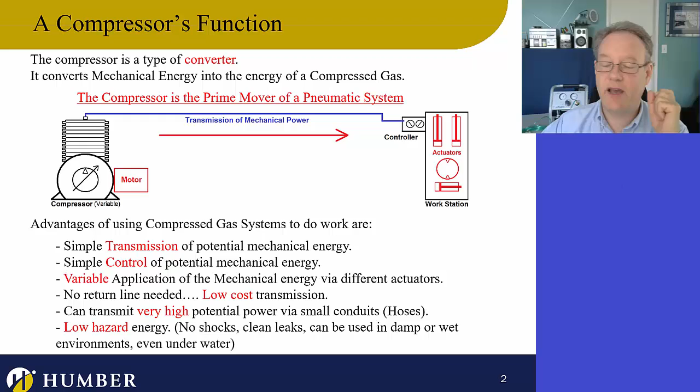Nice and safe - so pneumatics, it's pretty special, pretty cool stuff. So what goes on with compressors is that it takes air in and then it blows air out. The nature of the air coming in is just the atmospheric air.

It's not under pressure - it's not under anything more than 14.7 psi, just standard atmospheric air that's here. Then what it does is it compresses it, lowers the volume, and shoots it out of the compressor. So think a little bit about the flow rates going on here.

The gas that comes in is the inhaled gas, and the exhaled gas is a smaller volume. But the amount of air going out is kind of the same as the amount of air coming in - if I had this much air coming in, it would be compressed to this, but the same amount of molecules would be going out.

But the flow rate of air going in is actually different from the flow rate of air going out. That's because we study flow rate not by how many molecules are going in and out, but by what the volume of that air is. So essentially it comes in at low atmospheric pressure and leaves at a high pressure, and it comes in at a larger volume and leaves at a smaller volume.

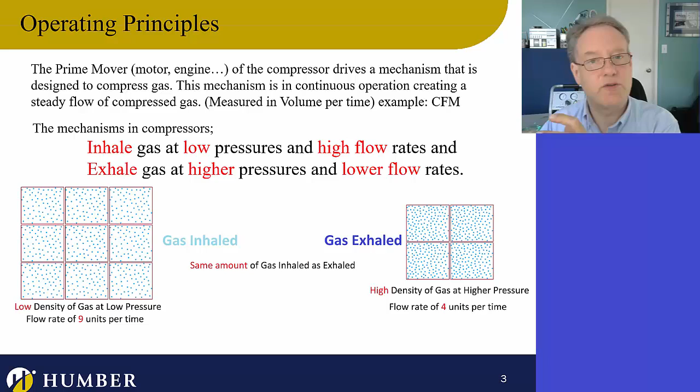There are two kinds of compressors: one is dynamic, and the other is displacement. Dynamic compressors generally have a higher flow and a lower pressure. Displacement compressors don't have really high flows, but they can have really high pressures. So they work under different principles, let's take a look at what's going on here.

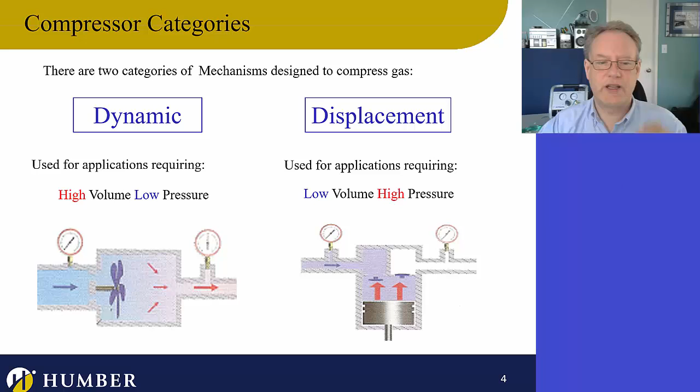The dynamic type adds kinetic energy to the air - it just speeds the air up. As we know, we talked a little bit about that last week, about the dynamics of the gases inside a chamber.

The faster the molecules are going, the more pressure they create, and you feel that on the outside of the wall. We talked about how Blaise Pascal understood that the pressure felt has to do with the kinetic molecular energy banging up against the walls. So if we increase the kinetic molecular energy, we're increasing the pressure.

And we can actually have really high flow rates with these things. You'll see, I've got some pictures here and some examples, and you'll see that going on.

So what's going on here is the displacement type actually grabs onto Boyle's law. It just says, okay Boyle, let's make your law work. What it does is it takes a certain amount of gas and doesn't add kinetic energy to it. It just crushes it. So it increases the displacement, increases the density of the kinetic energy, which is increasing the pressure. So it lowers the volume, and in that way it actually increases the pressure.

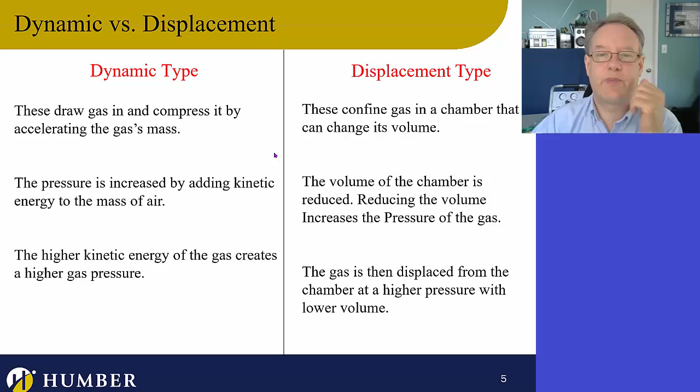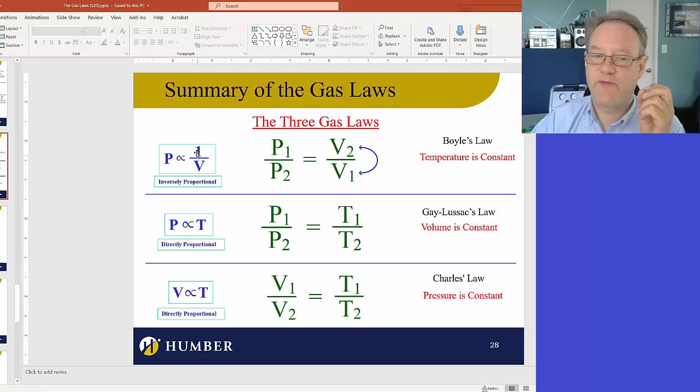And we know Boyle said that. Let's actually take a look at what Boyle did here. As you can see, the pressure and the volume are inversely proportional. So when the volume goes down, the pressure goes up, and vice versa. That's how compressors work. The displacement type of compressor, that's how that works.

So essentially, when we look at these two types, dynamic and displacement, we can see there are a whole bunch of different kinds. We're going to kind of only look at displacement. We'll take a quick look at dynamic, but in the pneumatics industry, if you go into any kind of manufacturing industry, which is pretty much every kind, you'll have to understand the different compressors. Mostly they're going to be using displacement. There are some special things that use dynamic, and we'll take a look at those in a minute.

But essentially, for displacement, there are two kinds: one is rotary and the other is reciprocating. Rotary is this thing that turns, and the nature of how it's turning compresses the gas. It's pretty cool. The reciprocating is just a piston going up and down, or a diaphragm going up and down as well.

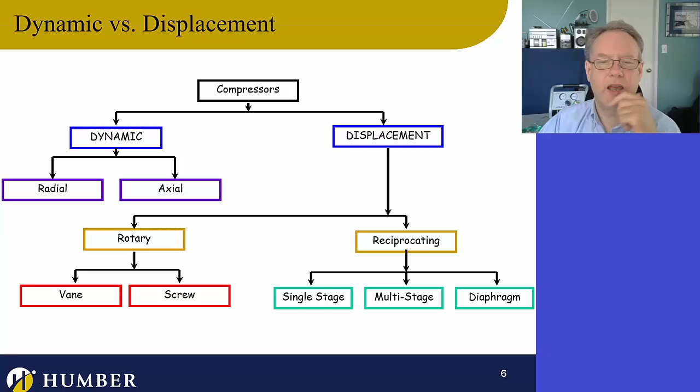And this is a good example: air mattresses and HVAC blowers. Those vents in your home, the air coming out of there is actually under pressure. The pump that's the prime mover in that system, the actual pump moving the air, is a radial type, and it's sucking air in and then pushing it out.

I don't know if you've ever seen one of those fans, but they look pretty cool. They're actually just a huge one of these things, much bigger than this. And you've probably blown an air mattress up. If you haven't, air mattress pumps are pretty cool, and they make a lot of noise. You can hear them going really quickly. They're a little annoying, but those are the kind you plug into your cigarette lighter or power plug in your car, and then they go.

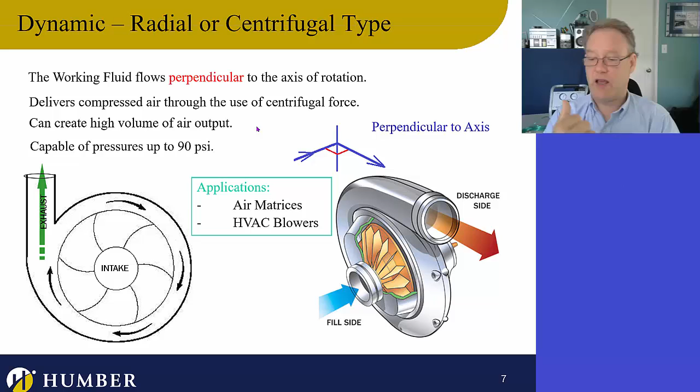So all the piston types, we use for manufacturing, automotive, automation, construction, painting, home use, recreational. If you have a little compressor that you want to fill up your tire for your bicycle or your car, you've heard those things.

You plug those, they're 12-volt things. You plug them in your power port in your car, and you can hear them vibrating, and you can kind of hear the speed at which they're going. You can hear their frequency. If you plug in one of those pumps for an air mattress, you can hear they're a lot faster. They really work on speeding up the air.

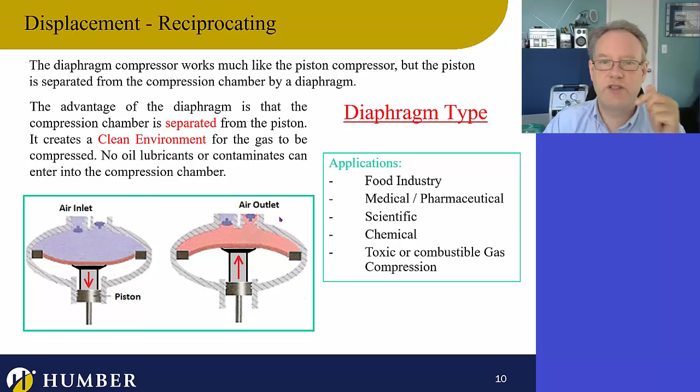Scientific, chemical, and toxic and combustible gases have to be handled so they don't blow up. We're going to use these compressors. They're pretty cool. In the medical industry, most of the pumps and equipment they use are like that. In surgical procedures, or compressing oxygen especially, they have to use these because oxygen can blow up real good.

As far as the two kinds of types go, what I want to do now is jump into a bit of the gas law theory. We have to understand the gas laws to move forward here. If you didn't get that, go back to last week and watch the video about the gas laws, because you have to understand that to move forward at this point.

Charles and Gay-Lussac actually looked at temperature. They asked what's going to happen to the pressure and the volume if we change the temperature. Boyle was just stuck on pressure and volume. These other guys looked at how temperature plays into it, and that's what we're going to discuss right now: temperature.

There are two ways to compress a gas. When we compress the gas, as you learned last week, the temperature increases. The amount of energy in the system stays the same, but because we're compressing it, the density of the energy is greater, so the temperature goes up. So the temperature goes up, and there are two ways to compress gas.

As we make that volume decrease, we know the temperature goes up, and also the pressure goes up. So when I decrease the volume, the temperature and the pressure both increase. It actually takes more energy to compress gas if we leave the heat in it—if we don't allow the heat to leave, it's extra work to compress it. If we don't let the heat leave, the pressure actually goes up higher, because the higher the temperature, the greater the pressure.

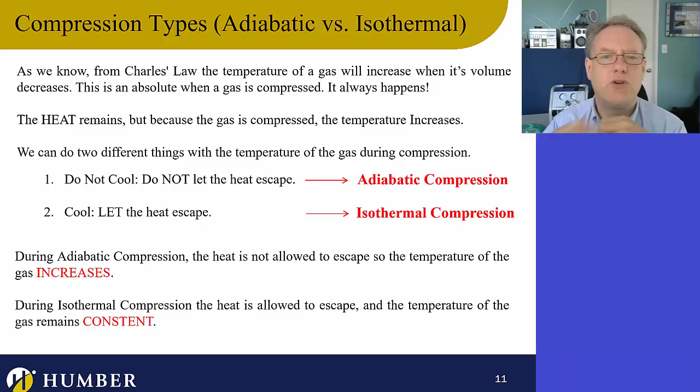That's really what we want for most compression. Adiabatic is pretty cool though—what happens with adiabatic is that we leave the heat in there, and the pressure increases a lot, and the temperature increases a lot. It really heats up to the point where we can actually ignite fuel. That's how diesels work—diesel engines are pretty cool, utilizing the properties of adiabatic compression where the heat isn't allowed to escape.

As we compress that gas a lot—like 10, 12, 13, or 14 times—the volume decreases by that much, so the temperature goes up by that much. When looking at temperature, if I were to double it from, say, 20 degrees Celsius, it doesn't go to 40—it goes into the hundreds, the 300s or 400s of degrees. It gets really, really hot—so hot that it actually ignites. And that's pretty cool.

So that's why diesel engines don't have spark plugs. They just compress the air so much that it gets hot enough to combust on its own. It doesn't actually blow up, it combusts, but it's fun to say blow up.

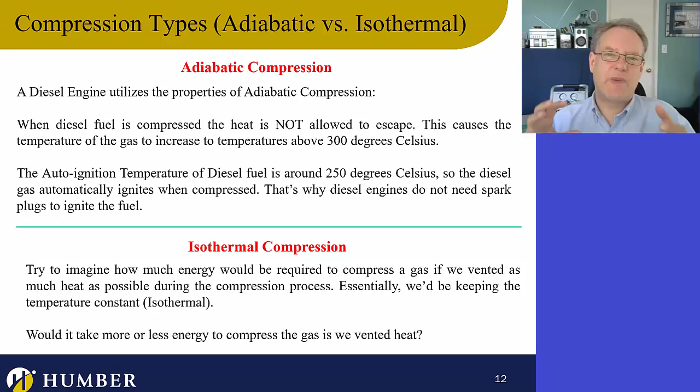Okay, so here we go. Isothermal compression is when, as we compress the gas, we let the heat vent out. We don't want the heat in there. It's actually better to let the heat out, because then we have to spend less energy compressing it.

This is called a multi-stage compressor. Not all compressors are multi-stage, but they'll all have fins on them and an ability to displace that heat. They don't want that heat in there because it's inefficient for the process. We'd rather take as much heat out as possible, and that allows the compression to happen with less energy.

It takes an enormous amount of energy to compress the gas. Once we compress it, here's what's going on. Let me show you this compressor. If I were to not let any of the energy out, let's take a look at this.

If I didn't let any of the heat energy out, the air in this tank would be really hot. I don't want hot air in my tank, because this thing is just sitting around in the atmosphere—it's going to cool down.

If I had compressed air in here that was really hot, and I didn't let any heat out—totally adiabatic—that heat would eventually dissipate. And we know that when we dissipate heat from compressed gas, the compression changes and my pressure decreases. So if I have adiabatic compression and leave all that hot air in the tank, it will cool down and the pressure will decrease.

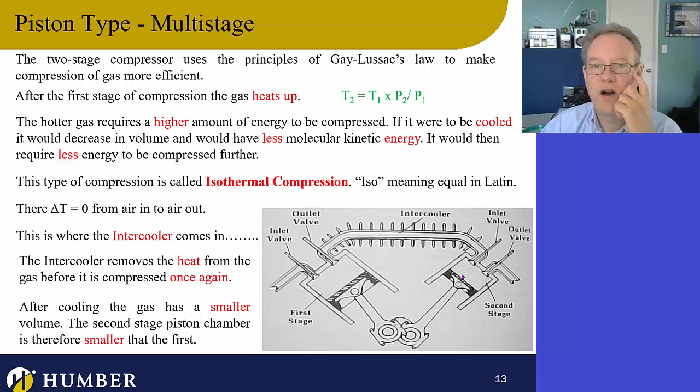Now watch this. This chamber and this chamber are different sizes. What's up with that? Well, let's jump into the whole concept of Charles law. Let's take a look at the volume. So I know I've got a certain volume coming in, I'm compressing it, and the volume is changing. It's getting smaller, but the temperature goes up. So when my temperature goes up, what's going to happen here?

Well, my temperature goes up, so my T1 is high, but I'm venting it through this intercooler. So now my T2 is lower. In this case, this number is lower than this number because I'm venting the heat. So if I take my initial volume and multiply it by a number less than 1, then my final volume is smaller. So the volume of the gas decreases by the time it comes out here.

Now, we're saying that the pressure is staying the same. So the pressure in here is increased, absolutely. So what's the temperature? The temperature is left to vent. If we let the temperature vent and we want to keep the same pressure, then we're dealing with a smaller volume. So we have the secondary piston smaller.

See what I tell you? You have to understand the gas laws to really wrap your head around how a compressor works.

So what I want to do now is actually run my compressor for you, and we'll talk a little bit about the components and what's going on here. One thing that's really cool is that there's an automatic control system in here. Let's just take a look at this guy.

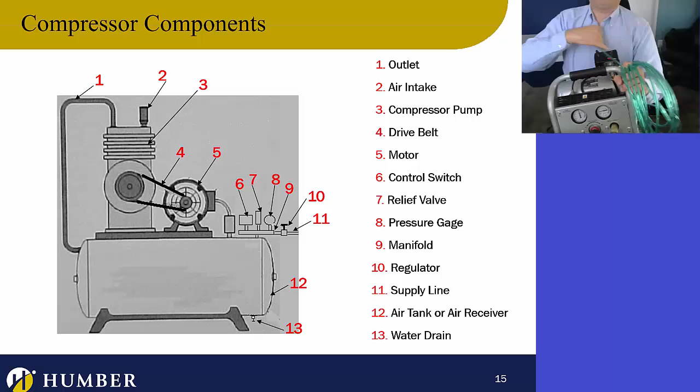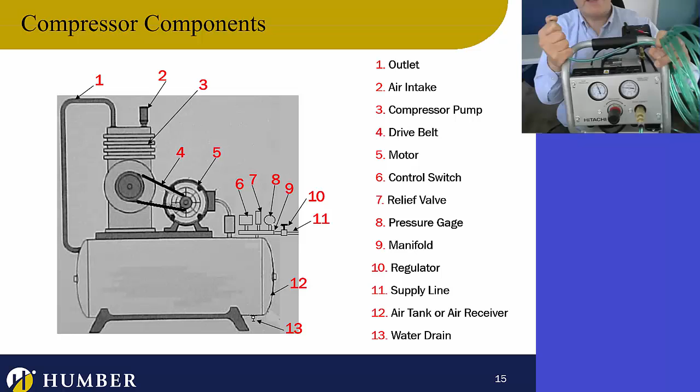Whoa, whoa, stop that. Oh, good. I got hose whip. I want that to, okay, this thing should come on. There, come on. Okay, so that quick disconnect, we'll let this thing go. See, now in here is the pressure switch. Just give it a second, it'll come up. Listen to it when it stops, it'll go. Did you hear that?

So that is actually, I'm going to do this. That's hose whip.

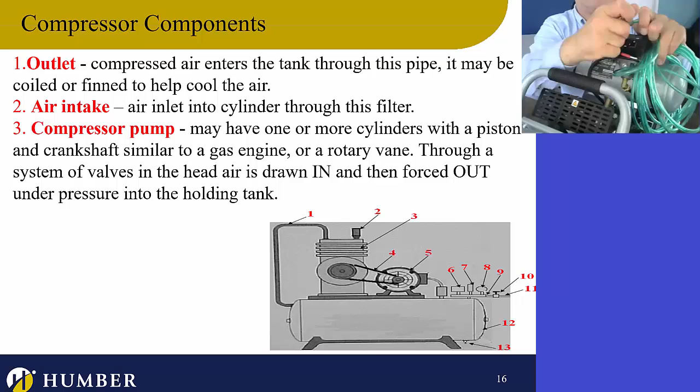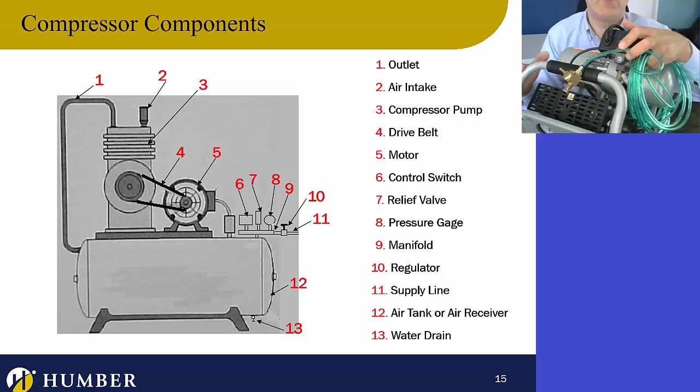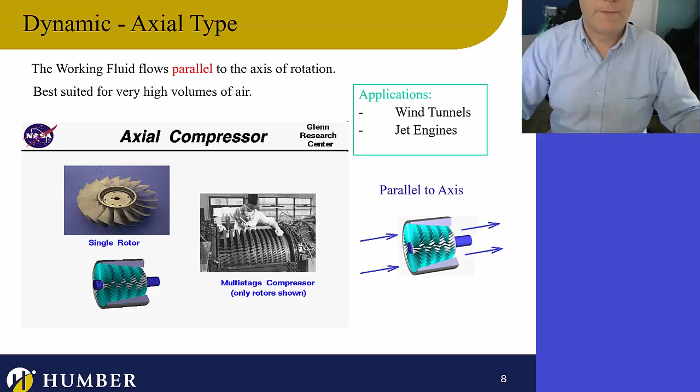So what's happening there is that the piston itself, when it's done the compression stage, the piston head, the top of the piston, this area here, right in there, when the piston stops, it still has compressed gas in it. That gas has gone into the tank. There's actually a check valve that doesn't allow the pressure from the tank back into the piston, but still the line from this chamber here to the actual check valve still has compressed air in it.

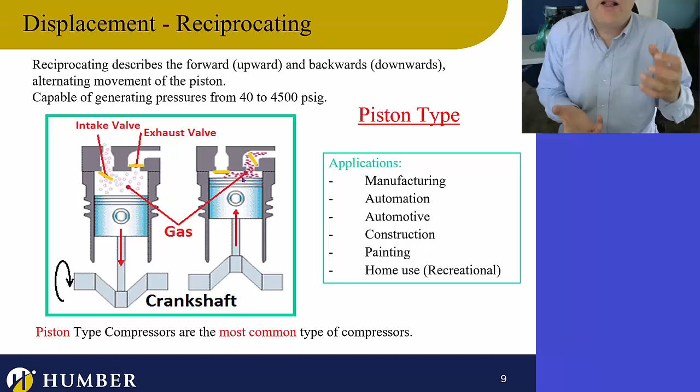And what's happening is that when that piston tries to move and come up again, it's dealing with compressed air, and it doesn't like that extra pressure, and it's hard on the compressor. So what we do is, when this thing is done and the air's gone into the tank, we have this little vent that vents the pressure out of the top of the head of the piston, and that allows that air pressure to go out. So when the compressor starts again, it doesn't have to fight that high pressure. That's what that little psst is all about.

You'll have some kind of liquid cooling or other cooling system, like an air conditioner type of system. Sometimes when we do that, we're compressing the air a lot, really kicking it up. Like scuba divers' tanks, those are about 3,000 psi, so they have special multi-stage compressors with really efficient cooling built in. That's what's going on there.

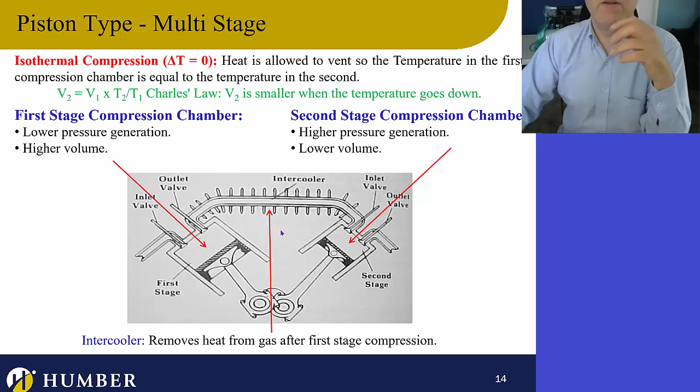The general gist of what's going on is the air comes out of the compression, and you can see these fins here taking the heat away. So this goes into the tank, and we have a tank because it's important that the air goes somewhere. We store it in there.

This is the air intake, so the air comes in here. We call this the breather. The air that comes in here gets compressed, and then it goes out here.

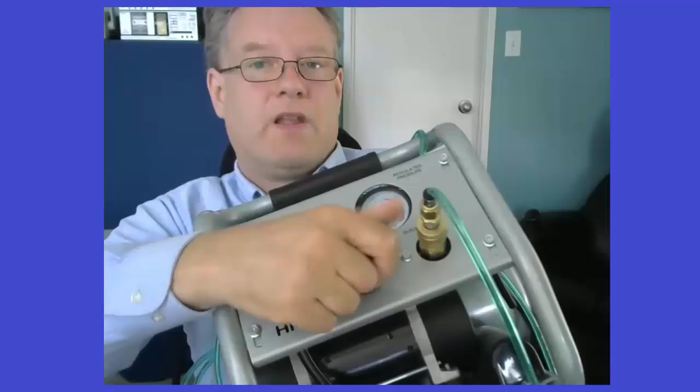The regulator is important too. It's the thing here that allows me to adjust the pressure. Let me just turn that guy. I'll crank it up, you can see it moving, and then crank it down. That's the regulator. What the regulator is doing is regulating not the pressure in the tank, but the pressure coming out of that hose.

It's kind of important that we pause on this for a second. The regulator actually will affect the flow rate to a small degree. What's happening is that the air pressure coming out of the tank is like a voltage dial.

It's like a variable voltage DC power supply. We can just turn the dial and the voltage coming out changes. In this case, the pressure coming out changes. And we know that if I were to change the voltage, the current would change as well, right? So in this case as well, the flow rate changes as I change the pressure.

We'll talk about that more when we look at some really cool examples about how to rate these and how to design a system. Once we've designed a system, how do we rate a compressor? We know we've got a certain amount of flow rate required at a certain pressure, so which compressor do we need to get? We'll go into that.

So the supply line, that's just the air coming out. Now, the receiver tank and the water drain, let's pause on this for a second. We won't get into how to rate these things, but you can actually design your own compressor and build your own tank, designing the size of the tank. You can look into that further if you want, there are formulas for that. But generally you're going to buy a compressor that's already there with its own tank on it, and it'll have a label telling you how much flow rate it can give you at whatever the pressure is. That'll actually be dependent on the tank.

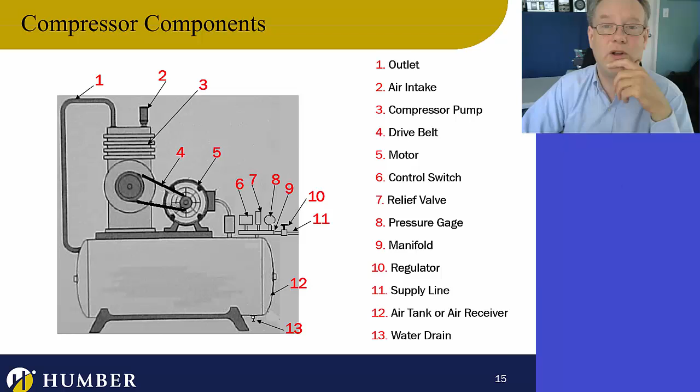Well, you have to vent it out. So this water drain is actually really important. You can get automatic water drains, but what you need to do is drain yours often. It depends on where you're using it. If you're in Arizona, it's probably not going to need to drain very much because there's not a lot of water in the air. But if you're in a moist climate, there's going to be more water in there, or if you're inside a facility that has moist air. So you have to make sure you drain that. When you drain it, it's pretty cool — the drain is clockwise, you turn it clockwise and that makes it open. The water will come out, and it'll be a little dirty too, so put something underneath it to capture it, because a lot of water will come out. You have to make sure you drain that.

Cool. So we just talked about all of these things. You guys can go back on all of them when you go to the test, because I'll ask you about them, and you'll be like, oh, I better open the PowerPoint.

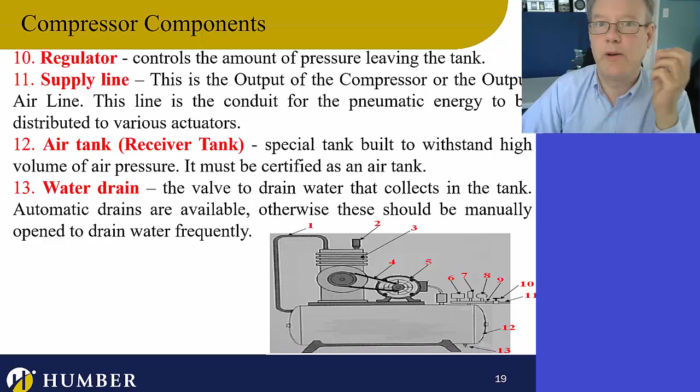So what we're going to do is talk about inlet air and outlet air and why they're different. Then I'm going to do another video on a bunch of examples where we put some math into this, using the gas laws to calculate what compressor we need. But right now, let's talk about inlet air and outlet air and why pressure matters — why the pressure of the air coming in and the pressure of the air going out actually change the flow rate. What's up with that?

Okay, so we've got this picture here. Essentially what's going on is we've got a nice little air filter in here, that's the breather — the breather is the air coming in. So the inlet air comes in here and then the outlet air comes out here. Now, I put a pressure regulator in here for a very important purpose.

The fact is, depending on what this thing is set to, the outlet air changes. Okay, so let's take a look at this. I've got these 3 different ways of looking at the air coming in, and they're all just the air. They're just this. So that air goes in, and then the air going out is at CFM. We've calculated CFM. We know all about CFM.

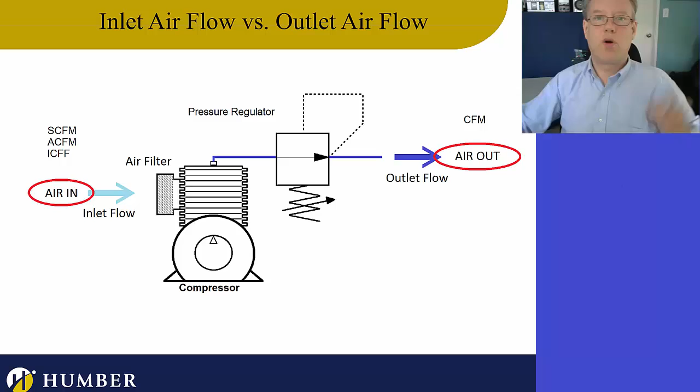When we're doing calculations for CFM, we're dealing with compressed air. When we're looking at SCFM, ACFM, or ICFM, we're looking at just this, just normal air that's coming in. So we'll study those different ones. So essentially it's cubic feet per minute. We know that one, but that's only when we're talking about compressed air.

So the standard cubic feet per minute is essentially, you know, this STP, this what's going on here, this air here, and it has a particular value to it. So it's 14.7 psi A, and it's 68 degrees Fahrenheit or 20 degrees Celsius at 36% humidity. Now there are some different people that take a look at what STP is, and people debate whether it's this or that, but it's around those numbers. But that's generally just this air.

Okay, so what's going on is that we get inlet cubic feet per minute and actual cubic feet per minute. That's actually just like saying, well, it doesn't really matter how much moisture is in the air. It doesn't really matter what the pressure of the air is, whether it's 14.4 or 14.8 or 14.7, or maybe even if we're up on an airplane where it's like 8.7. So if we're in an airplane, we're way up in the air, and the atmospheric pressure is 8.7 psi A.

So that air coming in, well, it's no longer SCFM. So we're not going to study our compressor in SCFM. We're going to actually study it in ICFM or ACFM, either one. So what's going on there is that I kind of like to just describe the inlet flow. I kind of like to say ICFM is just this inlet flow, whatever the air is that's coming in. So it doesn't really matter what we call these things.

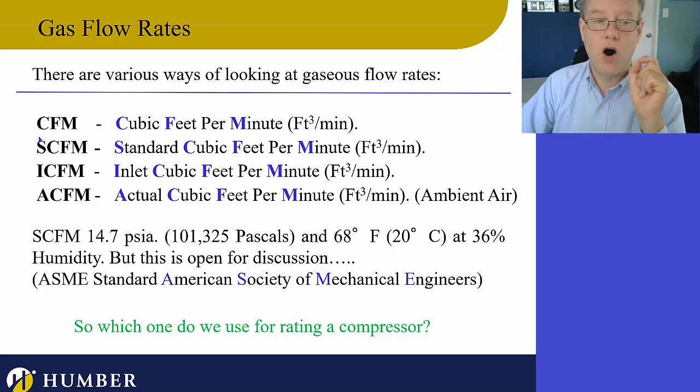Okay, so that's cool. So we've got this inlet flow and outlet flow, and we know that we measure them in these different things. This is inlet flow, this is outlet flow. CFM is cubic feet per minute. It's only when we talk about compressed air. All of these are the inlet flow. Okay, so we've got our inlet flow and our outlet flow.

But which one do we use when we rate a compressor? Let's say I wanted to go buy a compressor. Would I go and buy it and say, hey, you know what, I want a compressor that has this much inlet flow? Or would I say, I want a compressor that has this much outlet flow?

Well, the thing is, we'll learn actually that the outlet flow is dependent on the pressure that we set it to. That regulator, that dial that we actually turn, when we turn that to a different pressure, well, the outlet flow actually changes. So wait a second, if I've got my inlet flow and my outlet flow...

My outlet flow changes depending on what I set the pressure to. Does the inlet flow change as well depending on what I set my pressure to? Actually, yeah. So how do I rate a compressor? Do I just say I want a high flow rate or a low flow rate?

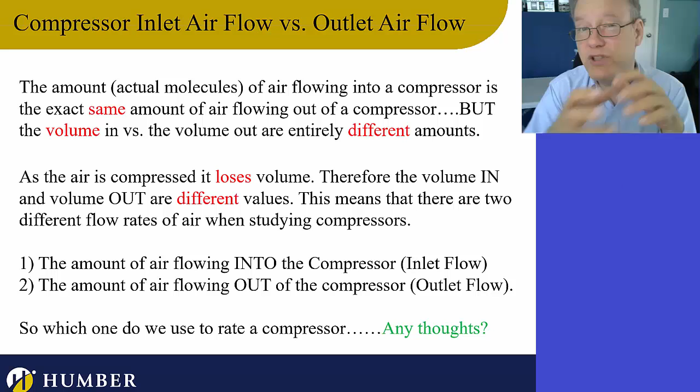What do I do? Well, the rating of a compressor is dependent on the pressure setting that you set it to. We can actually get compressors that are rated for inlet flow, but most of them are rated for outlet flow. So let's take a look at this.

Most manufacturers rate their compressor for the outlet flow, and they actually have to rate it with the pressure. They have to say, well, if you're going to run it at this pressure, it will have this outlet flow. If you run it at that pressure, it will have a different outlet flow. The inlet flow is also dependent on pressure to some degree.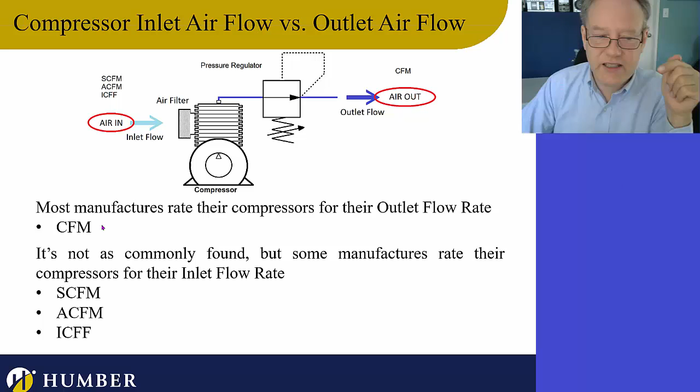But when you see compressors rated for inlet flow, they don't actually give you the pressure. They're not as dependent on pressure, although they are, just not as much. Let's just stick to CFM at a particular pressure and look at some examples.

So what's going on here? In the end, all the user wants to know is, can they run their system? All of the actuators, tools, or operations are set to a specific pressure. So if it's set to a specific pressure, well then what's the flow rate at that pressure?

Well, you have to calculate that. You have to go and calculate all your actuators, and say they're running at a certain PSI and moving a certain amount, and the displacement is the CFM, the cubic feet per minute. We know the displacement per unit time is going to end up being calculated as CFM.

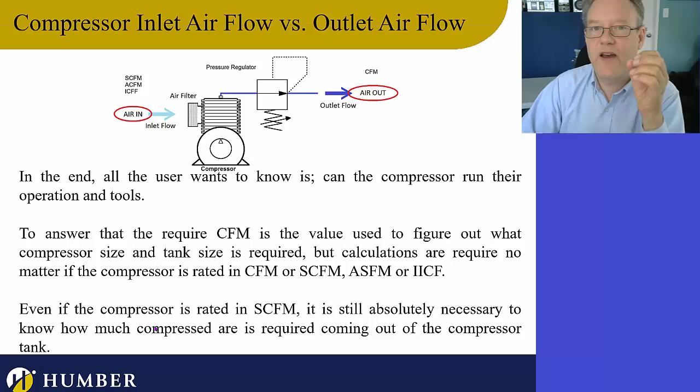So now we've got this. We know the CFM and we know the pressure. So let's move on and say, okay, I'm going to rate my compressor on this, because most compressors are rated this way. Let's move on here.

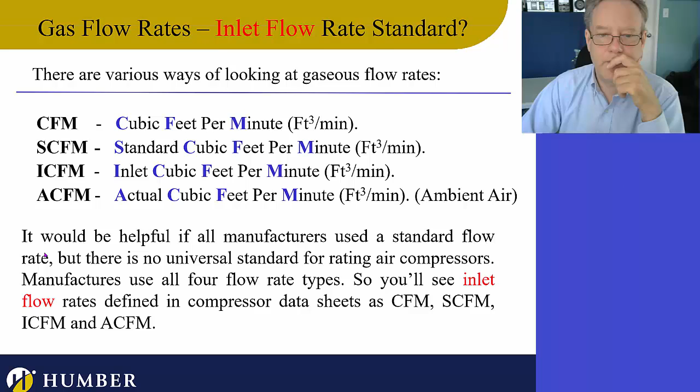So we know the compressor comes with these ratings. Let's take a look at this. It says here that if you run it at 90 psi, if you go and buy this DeWalt hot dog compressor—what I'm saying is hot dog compressors, you'll see this on construction sites and stuff.

So if you go and buy this and run your tools at 90 psi, this compressor can give you a flow rate of 4 cubic feet per minute if you run it at 90 psi. If you run it at a different pressure, that flow rate will be different, and we'll see whether it goes up or down.

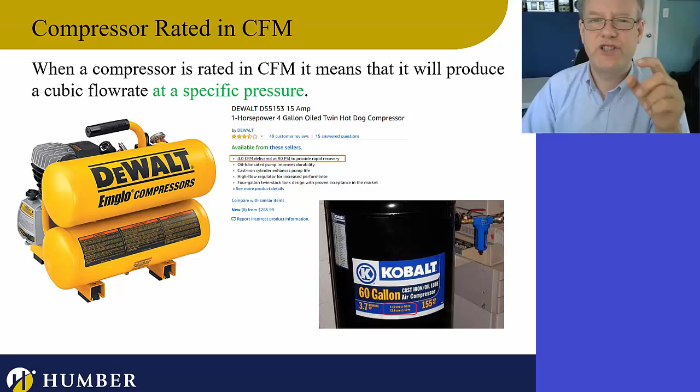We'll see that. If you take a look at this guy, there are actually 2 ratings on here. At 40 psi, if you run it at 40 psi, this compressor can give you 11.8 cubic feet per minute. No problem. That's what it's designed to do at 40 psi.

Watch this. If you run it at 90 psi, now you're only getting a flow rate of 10.3. The reason is when we compress air greater, the volume goes down. When we compress it to 90 psi, the volume has gone down. So if my volume has gone down, then my flow rate's going to be less.

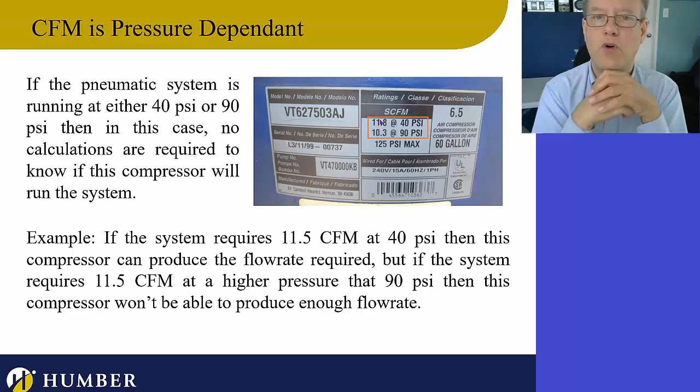Absolutely. So it all depends on the pressure that this air is coming out at, and then the flow rate changes. Again, just like voltage—if you go to your variable DC power supply and change the voltage, the current will change. Absolutely. So they're very dependent on each other.

So let's talk about the flow rate of air, the pressure of the air, and the volume, and how they're all linked. We're going to start with an example. But we're talking about everything in absolute pressure, and the reason is because we have to look at these ratios that we're studying in the gas laws, and we know that we can't use gauge pressure in the gas laws.

So moving forward, we have an example here where we've got an absolute pressure of 50 psi. Let's say we're looking at a multi-stage compressor. In the first stage, the air coming out is at 50 psi A, and the flow rate of that air coming out is 10 cubic feet per minute.

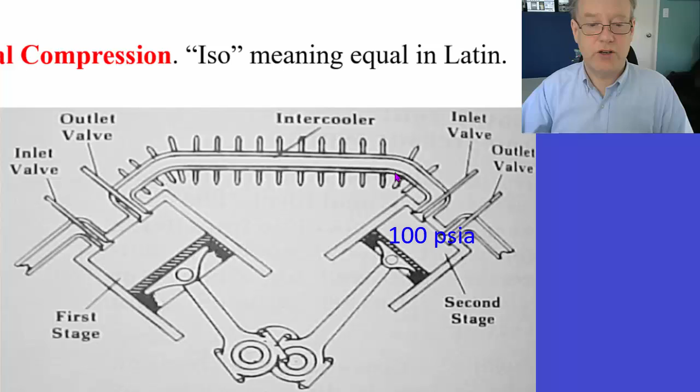That flow rate is going to go into the second stage and it's going to be compressed. The volume is decreased by half. If the volume is decreased by half, then the pressure is doubled. So the pressure goes up to 100 psi.

Now that's if it's an isothermal reaction. Again, all of these things we're studying are isothermal. We're going to do all our math with isothermal unless we're doing adiabatic compression, in which case we'd have to put the temperature in. But right now we're not worrying about the temperature.

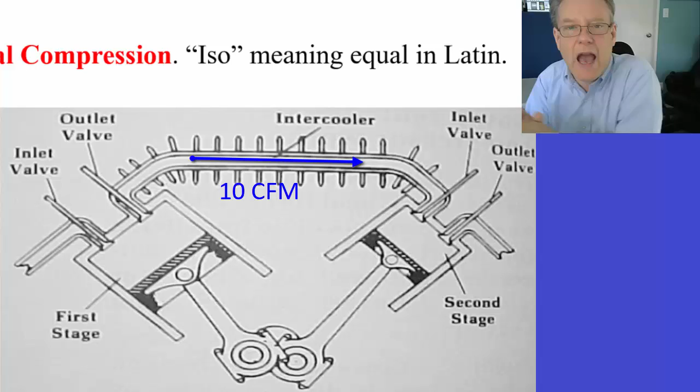So is the flow rate going to be the same going into that compressor? Let's say the flow rate coming out of the first stage is 10. Is the flow rate coming out of the second stage going to be 10? Well, no, it's going to be half, because the flow rate at 50 psi changes. There will be half the flow rate that it was at 50 psi. We know that because we've just changed the volume.

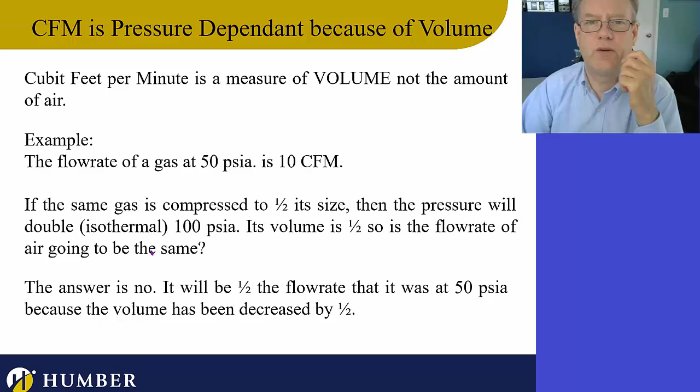So let's move on, I think you get that. If we wanted to take the general gas law and throw all of these things into a formula we can use to study how flow rate, pressure, and volume are all linked, we take the general gas law and throw a T into it. So manipulating the general gas law around, we can say P1 times V1 times T2 equals P2 times V2 times T1.

That capital T is for temperature. All of a sudden we divide both sides by T, because we can do that since the time in and the time out are the same, it's just time. So if we throw a T in there, look at that - we've got our volume over our time, and we get a flow rate. Let's manipulate this a bit more and get rid of that VT and just call it Q.

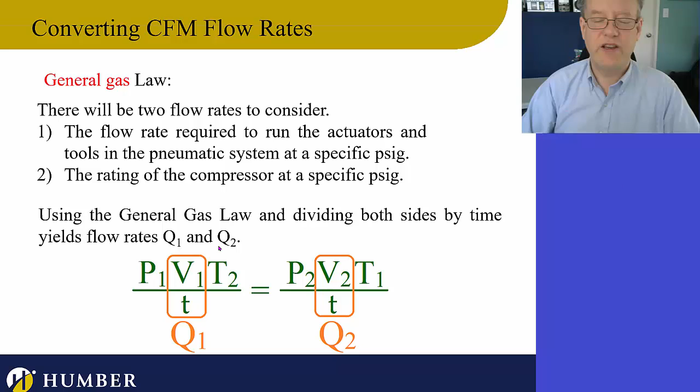So this is the derivation of all of this, and if we were talking about adiabatic compression, we'd need to use this to study how the flow rate, the pressure, the temperature, and the volume are all linked. But because of volume and time, we know the flow rate is going to be different on one side and different on the other, and we know the time's the same. So as opposed to just studying the volumes, we're going to study the flow rates because flow rates are really important for us - that's how we rate compressors.

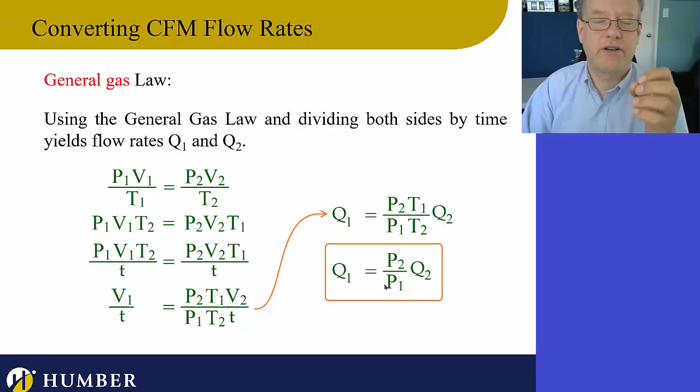So this is our general form here that we're going to use when we're dealing with isothermal reactions. Again, if we're doing adiabatic compression, we're going to use that other one. Isothermal, we're using this guy. So let's use this formula and actually use it to select a compressor, to get the right compressor for our application. So here we go, this is a compressor selection.